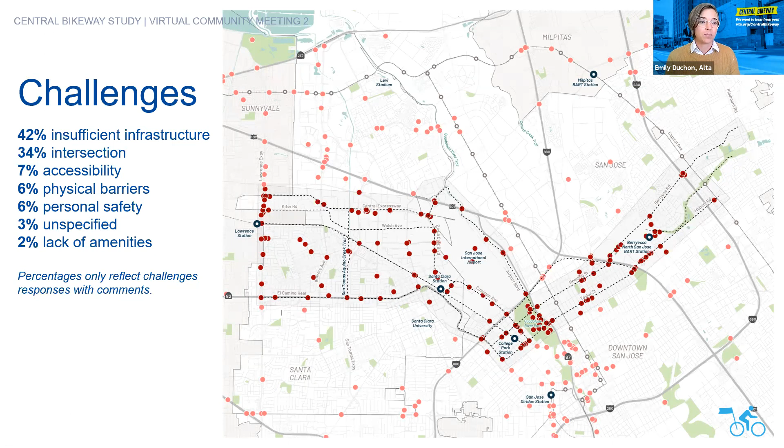The top two challenges we heard were related to insufficient infrastructure or lack of bikeways or protected bikeways, as well as challenging intersections.

We collected information on the destinations that you wanted to reach by bicycle. This is a great collection of destinations, and we'll be using these to evaluate how well the various alternatives connect to these community desired destinations.

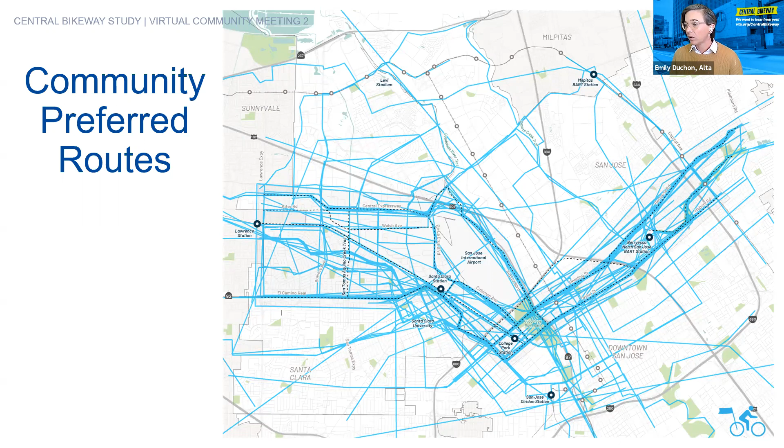Community members were also asked to draw their preferred route for the Central Bikeway. You can see that we had a lot of routes drawn, with preferences along Hedding, Taylor, and Penitencia Creek in San Jose. Over in the west, El Camino Real, Monroe, and Central Expressway to the Guadalupe River Trail were also priority areas.

We used this community feedback to help develop the alternatives that we're sharing with you today and asking for your feedback. Donny is going to share a little bit more about the process we went through in developing these alternatives.

We started developing the alternatives by focusing on corridors, looking at street and trail corridors throughout the study area. We then looked at how to connect those into cohesive and continuous 8-mile bike superhighway routes. Most recently, we've been working to refine and identify 3 alternatives that best respond to the project goals, stakeholder input, and public feedback.

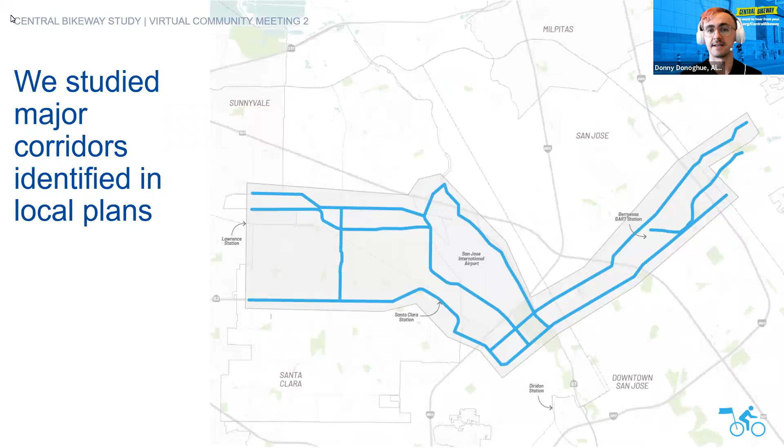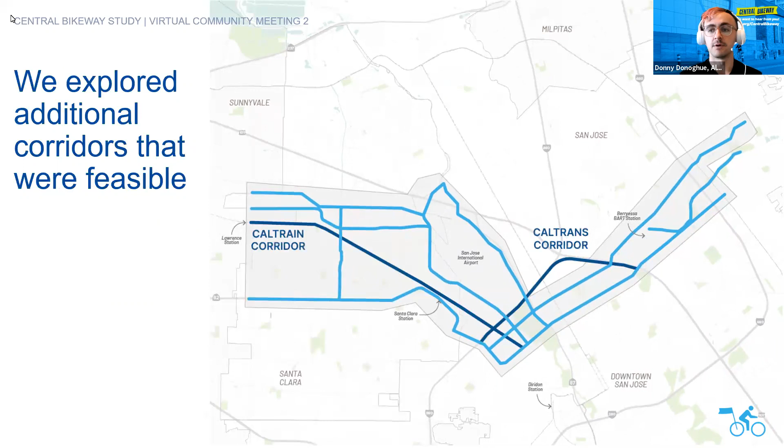In more detail, we studied first the major corridors identified in local plans, shown on this map. We then explored additional feasible corridors, such as the Caltrain corridor and the 880 and 101 freeway corridors. We identified additional corridors that help close critical gaps between these larger corridors, and combined, used that to create a network for developing a bike superhighway.

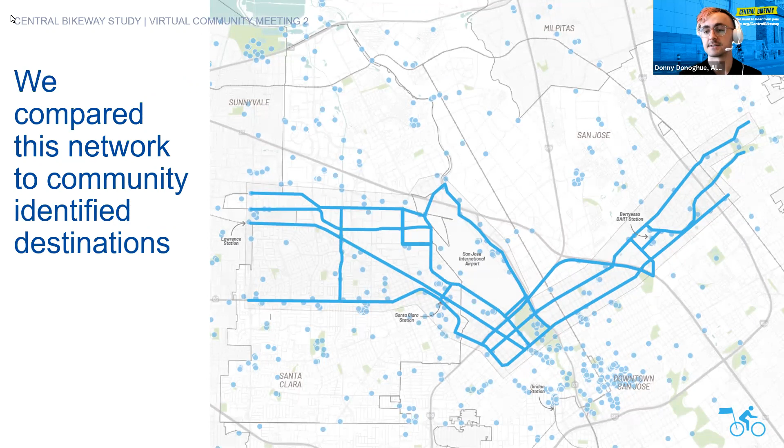We then used this network to compare it against the community identified destinations from the first round of outreach, to see which network parts best connected to these destinations. We also overlaid it with the community identified routes to see which ones best aligned with those from the first round of outreach.

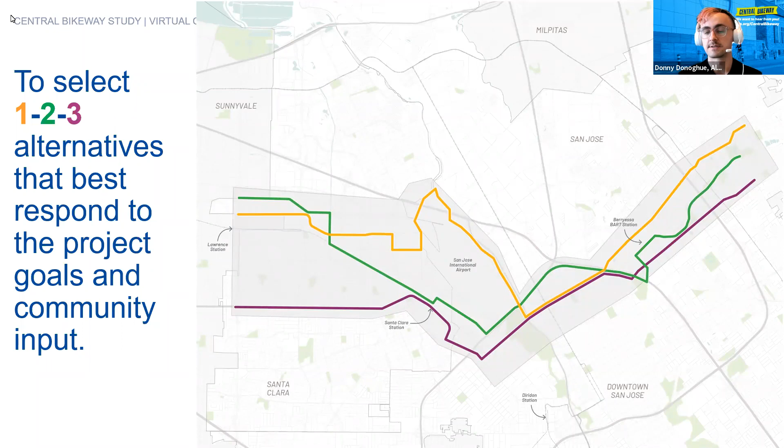All that led to developing 3 alternatives that best responded to both the project goals and the community input from the first round of outreach.

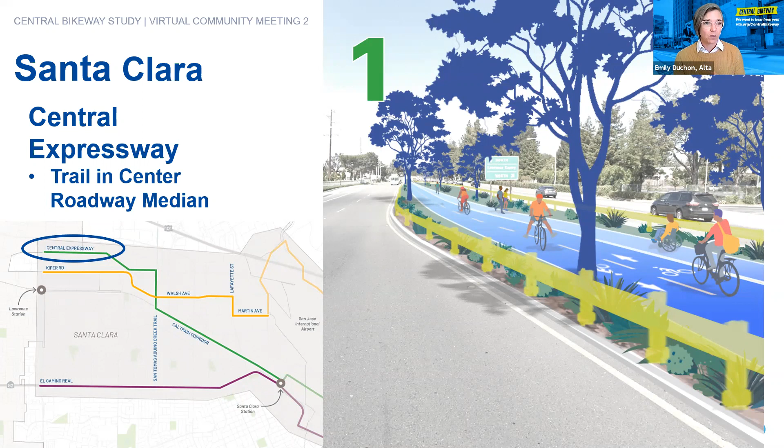This alternative would utilize San Tomas-Aquino Trail to connect south to the Caltrain or railroad corridor, where we're just starting to explore the feasibility of a rail-with-trail along the south side of the corridor. This is a corridor with future plans — there are existing trains running through here, and also future plans for high-speed rail. Somebody mentioned noise, so we've determined there is potentially space and there could be buffers to mitigate some of those competing impacts as the corridor changes with its rail use over time.

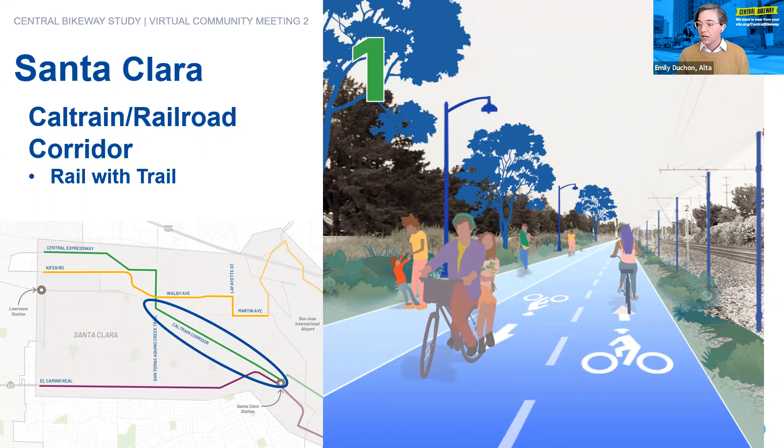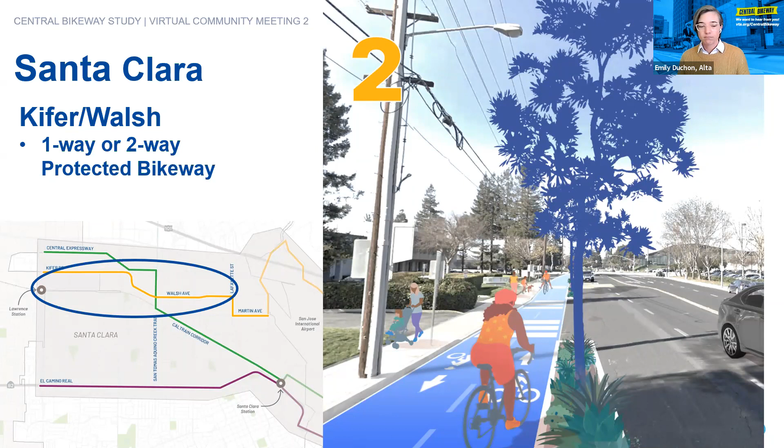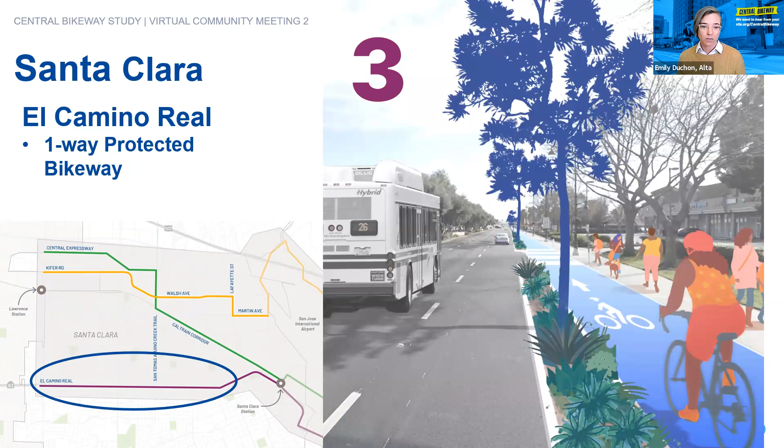So we're going to take a minute to do another poll and ask you to choose your preference. The first option is Central Expressway connecting to the Caltrain corridor, the second is along Kifer/Walsh, and the third is along El Camino Real. If you have other thoughts, or don't want to choose one of these, or wish you could choose more, feel free to share those in the Q&A box, and we can talk further at the end of the presentation about modifications, tweaks, or ideas for knitting these all together in different ways. But this is just a high-level question where we're forcing you to choose one preference. If you have a tie or another option, feel free to share that in the Q&A box.

So we'll go ahead and share the results of the poll. All right, well, it looks like we have support for all of them, but El Camino Real has won out with nearly half of you responding, and Central Expressway Caltrain Rail Corridor is a close second.

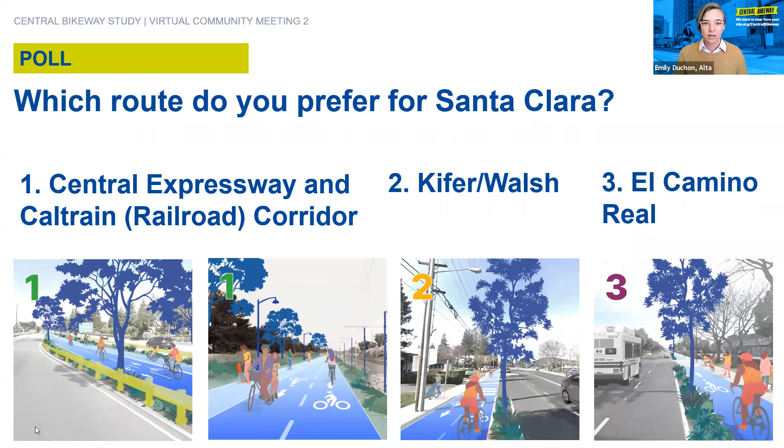Thanks, Libby. It's nice to see that there's some support for all of the options, that people could imagine it being on any of those corridors. Okay, Brent, do you want to guide us around the airport? Oh, the big challenge. Thanks for your responses. This is always really exciting to see what people think.

The airport is a major barrier in the middle of the study area, so we really have to think about whether we go north around the airport or south around the airport. We wanted to definitely study an option for both. So we have one option north of the airport using Trimble and a new interchange that VTA is currently building, and the Guadalupe River Trail, and two options south: Coleman Avenue and Airport Boulevard, potentially using Caltrans right-of-way, and the El Camino Real, Alameda, and Hedding Street further south.

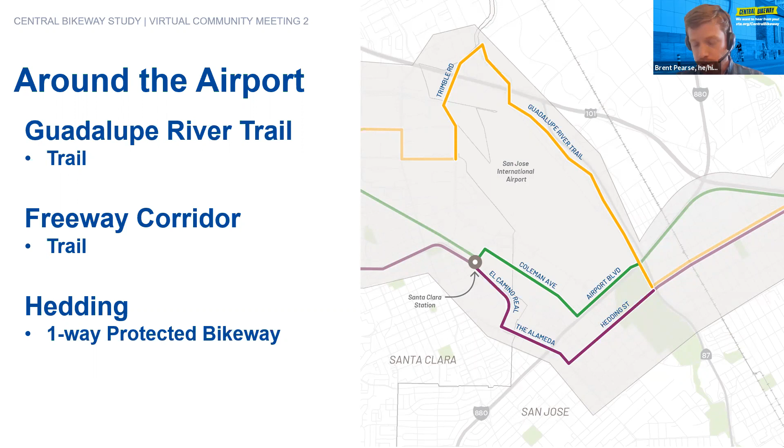The second option to go around the airport would be to the south, using potentially segments of Coleman, and then connecting into the freeway corridor. This alignment would require almost like on and off ramps for bicycles to get into certain parts of the trail-like experience. So we would have grade separations for bicycles to enter challenging parts of this right-of-way. It would also have more limited access.

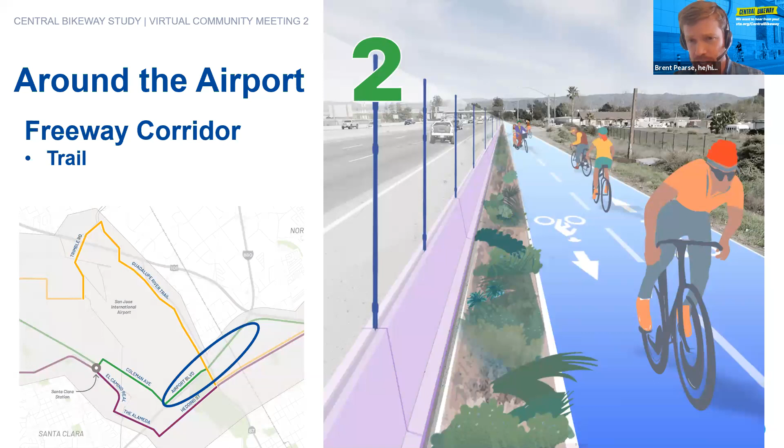And then the third and final would be using an extension of the El Camino to the Alameda, and eventually Hedding - this is the junction between Santa Clara and San Jose. It would be an all on-street protected facility. It would have much more points of access and connect you with more destinations that have been identified as places that the community wants to connect to.

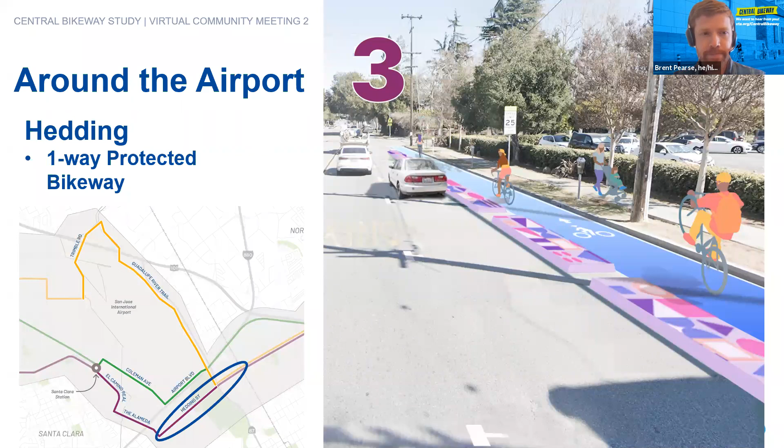Okay, so again, we're going to put a poll up on the screen, and you'll have three options. Challenging to pick which ones you'll ride in. We'll give you all a few moments to think about whether you want to go north or south, whether that connects you to where you need to go - your job, possibly appointments, visit a friend. And think about what kind of experience you want to have when you ride on one of these facilities. Is it joyful? Do you feel safe?

What percentage are we at, Libby? I'll go ahead and end it. We have about 80% of people responding. So let me just share out the results. Great. Looks like there's overwhelmingly 65% of people prefer the Hedding and the Alameda route, with another third preferring either the freeway corridor or Guadalupe River Trail. We're looking at 12% for the river trail and 24% for the freeway corridor.

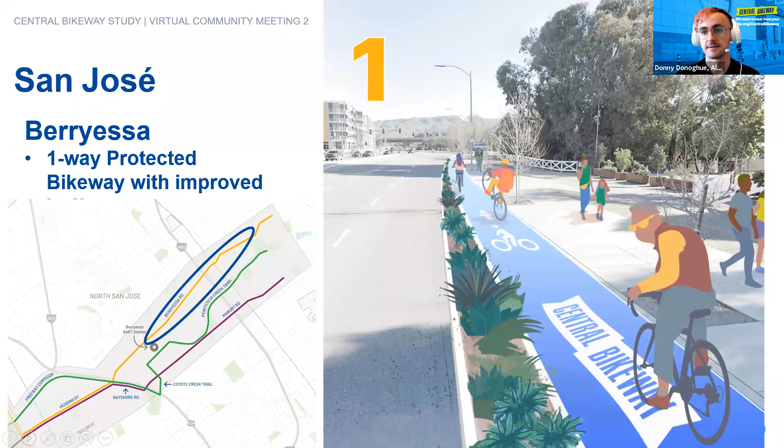The trail trackway is following Penitencia Creek Trail. This would be a widened trail that would provide separated walking path and cycling path. Currently there's a trail running along here, which is heavily used for recreation, and by widening it and providing separate areas for walking and cycling, it would reduce the conflict between trail users.

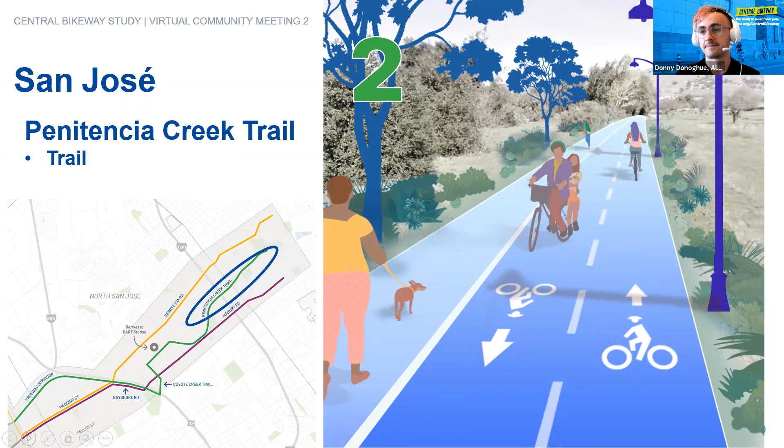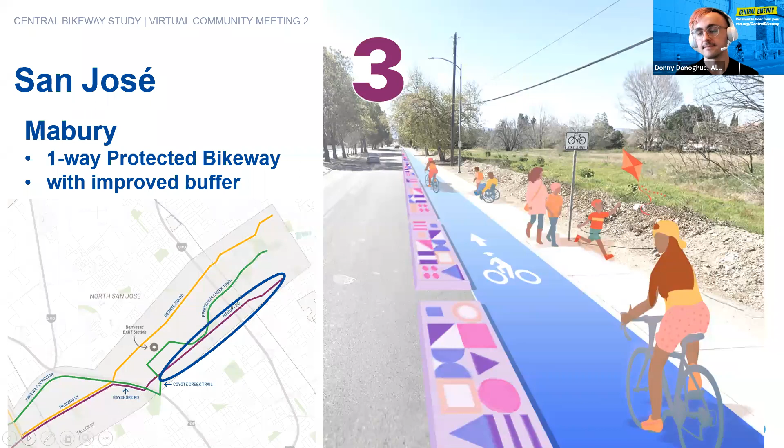And we're going to do one more poll question for San Jose, really focusing in on those northernmost options. So which route do you prefer in San Jose? Is it a protected bikeway on Berryessa Road? Is it an off-street trail along Penitencia Creek? Or is it a protected bikeway along Mabury Road?

I think Donny has another calling as a game show host. That was very well done. Thank you, Brent.

All right, well, what do you all think? 10 more seconds, we have a few more people to vote. All righty. So it looks like the Penitencia Creek Trail is the clear winner in this crowd, with nearly 70% of you preferring that. Berryessa Road and Mabury Road are far distant, with 13% and 19% respectively.

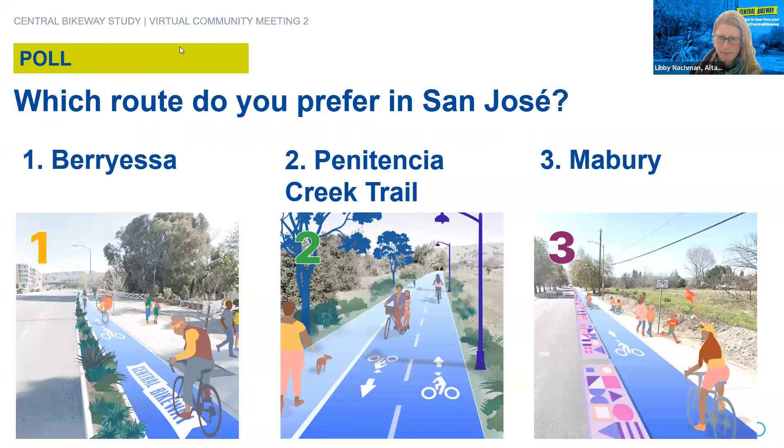Okay, I think this is me. Well, thank you, that was really informative, and you could really see a lot of different variants between the different segments about the type of alternative or experience that people want to have in the audience.

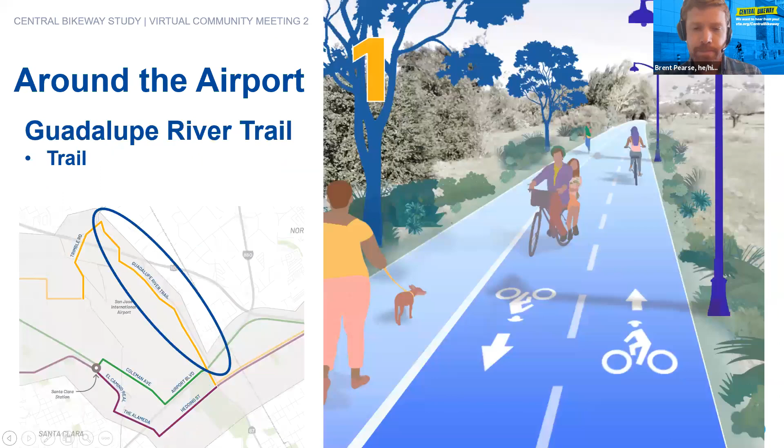For other audience members, Ken was talking about communities of concern. This is a definition used by the Metropolitan Transportation Commission to define communities that are generally underrepresented by investment. These are low-income communities, communities of color, communities that don't have great access to transportation. One of the reasons why we chose to focus on the central bikeway study area above all of our other potential bike superhighway corridors is because it has 2 significant communities of concern in it.

One of them is that triangle in Santa Clara, just to the left of the first black line in North Santa Clara. And the other large community of concern is in San Jose, around the Japantown, Hedding Street area, Taylor Street area, kind of north central downtown. So we used communities of concern to actually pick the first project that we were really going to work on with our partners as an agency. That was really defining criteria.

Secondly, to help us identify where these 3 alternatives should be and who they should serve, and thinking about access to the future facility, we used communities of concern and where they're located to help inform that. That was our initial tier that we used to develop some of the corridors before we narrowed them down to this 3. And as we move further along in our study, moving from 3 alternatives to 1, we're going to further define

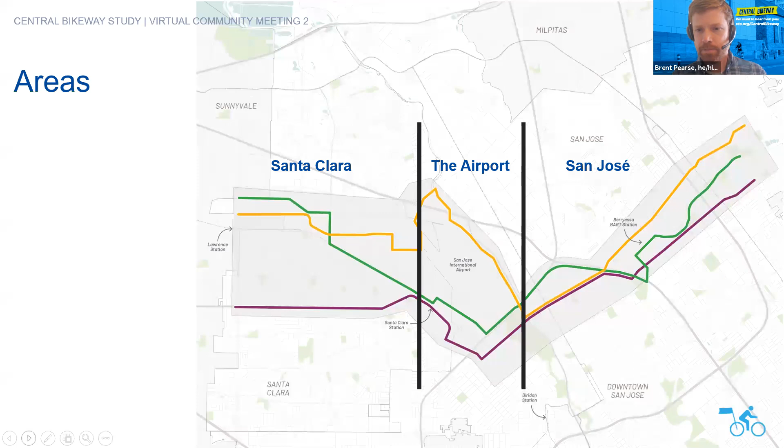Wow, this has been super helpful. Hopefully it's been very informative for all the participants today. It's great to see all the polling information come back and to visually think about all of your preferences and where you would like to ride in the county and how you would like to get there, and hopefully provide a little joy maybe one day while you get to do that.